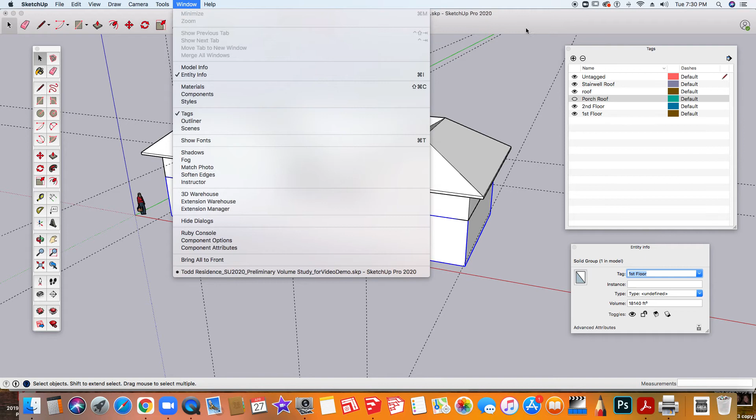And you can see here that because I've created the group first floor, that it is selected here. If I wanted to put it on a different tag, I could select one of these. When you make a tag, it will appear in the tag list in the entity info box. In order to turn these on, you just need to go to the window, turn on entity info, and turn on the tags window. So at this point, I can now turn on and off my roof. I can turn on and off the second floor, the first floor, and the porch roof.

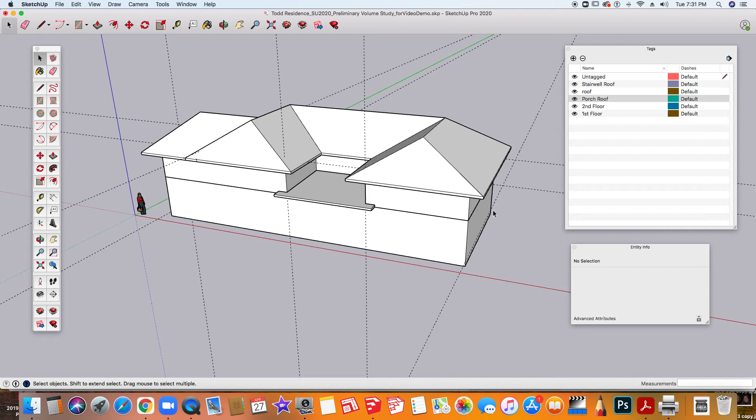So things are isolated. And so now I need to take these floor plans and create my walls, where I want my walls and where I want my windows in my floor plan. Now this is a little bit opposite of what we usually do. But because we did these volume studies first, and maybe you shifted some of your exterior walls so that it worked better with your overall design of your house, we didn't add walls into this structure. So we need to add them.

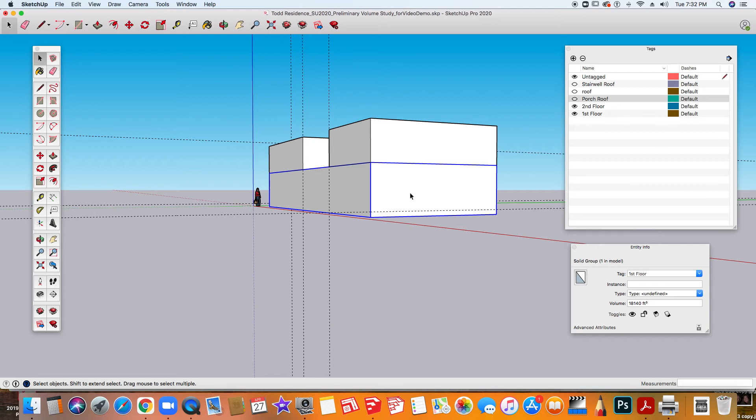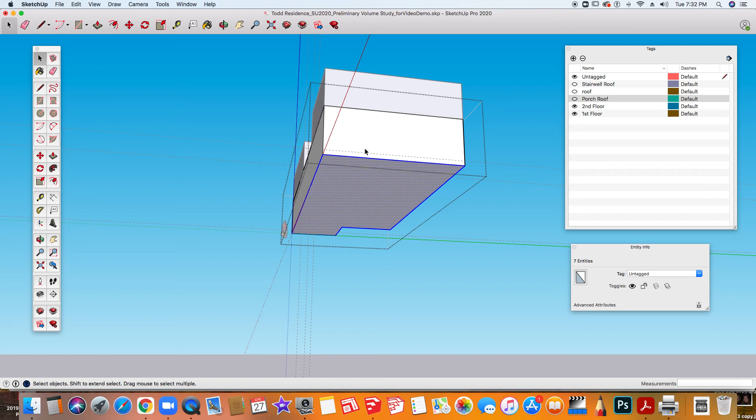So what you're going to do is you're going to turn off all of the roofs. So now I'm left with my second floor here and my first floor underneath. I'm going to select the first floor, and this is grouped. So I'm going to have to go into edit mode, in which I double click, and I am going to select just the bottom part of that solid. So to do that, I'm going to take my selection tool and I'm going to click twice, getting the surface area of the bottom and the edges that are highlighted in blue here.

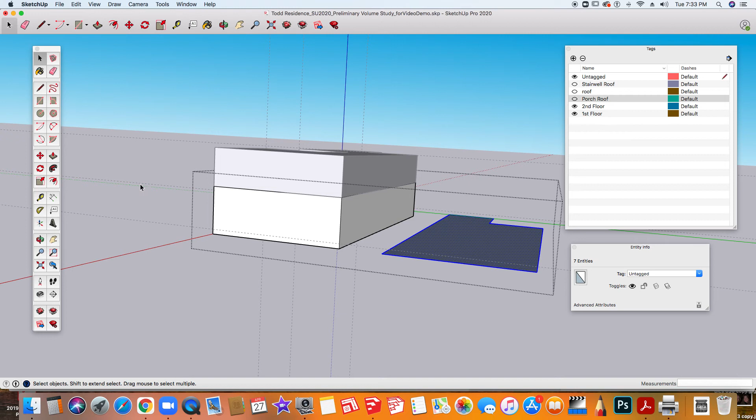Next, I'm going to take the move tool and I'm going to select the corner. I'm going to hold the option key down and I'm going to pull on the same plane. You can see that things are disappearing a little bit. I'm going to pull that floor plan there. Now you'll see that it's part of the group. So what I'll want to do is click out of the group, and when I click that first floor, you'll see that what we're going to build our floor plan on, that bottom surface, is selected. So I need to explode this group. So I'm going to right click and I'm going to click on explode.

And next I'm going to deselect, and then I'm going to triple click on my floor plan here on the floor surface. I'm going to make a new tag called first floor plan. And I'm going to use FP for short. And I am going to group this. And then I'm going to go to the entity info box and I'm going to find the first floor plan. And once I do that, I can turn the eyeball on and off so that I can work with this floor plan.

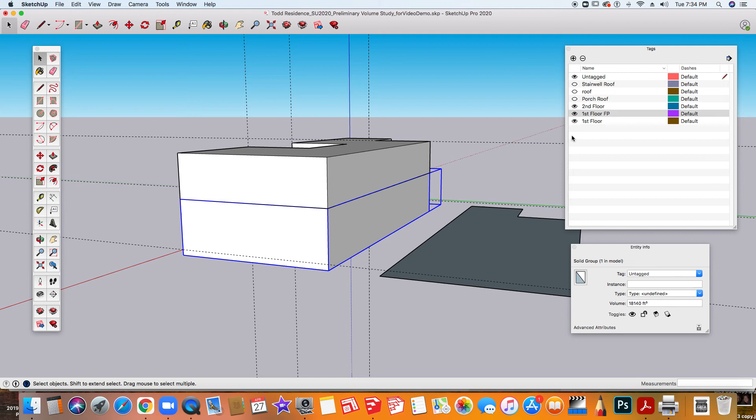Now, don't forget, you need to come back to your first floor, triple click it, and orbit around and make sure you got all the parts, and you're going to right click and make that a group too. So now when you go to turn off your first floor, it will disappear. Now it seems to be connected here. I'm not too sure why that happened, but we will work on that. I know when we do that separately, it should be okay.

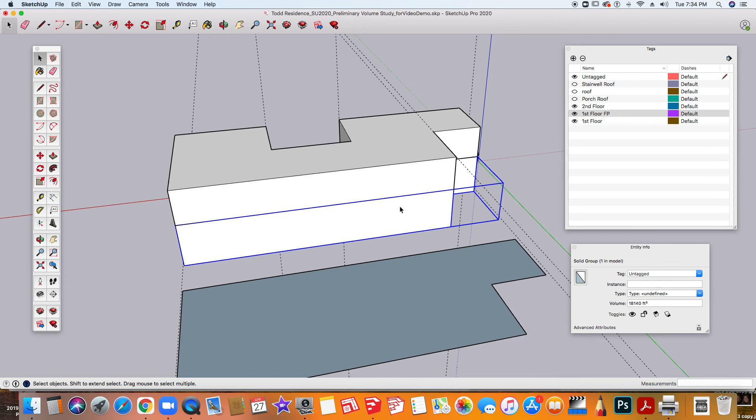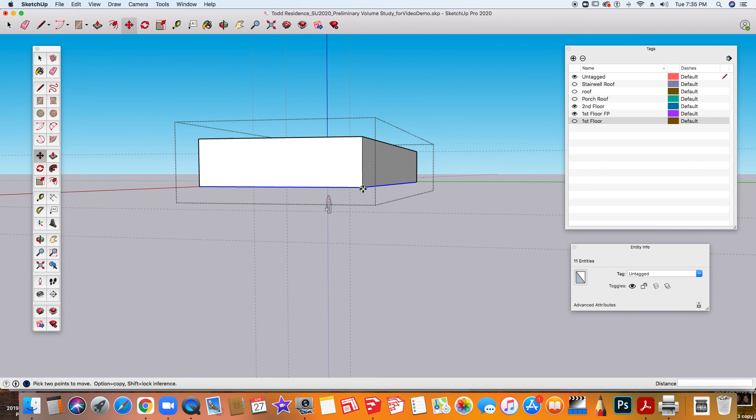So I'm going to do the same thing with the second floor. Now I'm going to turn off the first floor. I'm going to select this bottom layer, triple click, and now I'm going to click my move tool, and I'm just going to grab the corner, hold the option key down, and pull that away so that it's on the green axis and I know that it is parallel. Again, I'm going to select it, click explode,

deselect, triple click the second floor here. Make sure that's selected. I'm going to apply this to the second floor. As you can see, it's already done that way. I'm going to group it. And now I'm going to triple click the floor plan part, and I'm going to make a new layer called second floor plan.

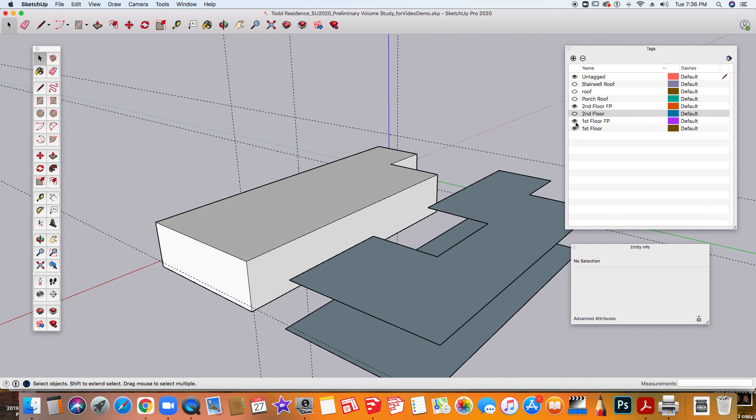And I'm going to change that to here. And now I'm going to click, and I'm going to group this also. I think I already did group it, but I'm not sure. Nope, I didn't. So I'm going to right click, and I'm going to say make group. So now if I turn on the first floor and I turn off the second floor, I have the second floor and I have the first floor. Now that's the first floor plan, and here's the first floor. I'll have to figure out why that's not working properly.

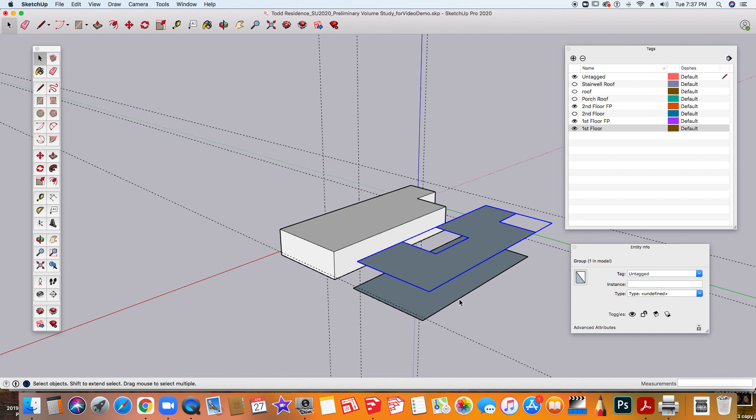But anyway, what you're left with is these two floor plans. And what's nice is once you have these, you can move them separately. I can start to lay out my floors, and I'm going to show you that in the next video.